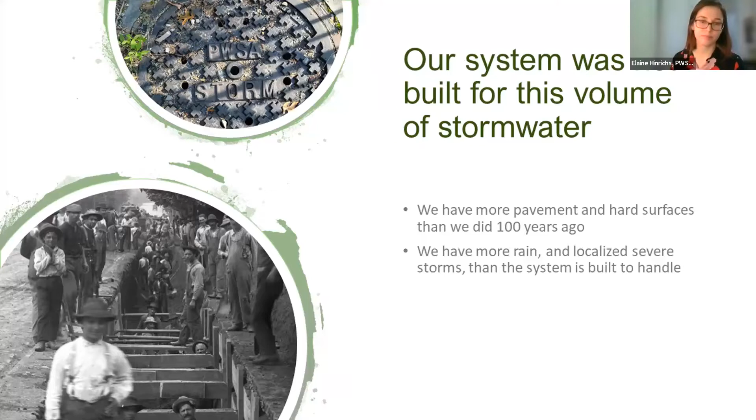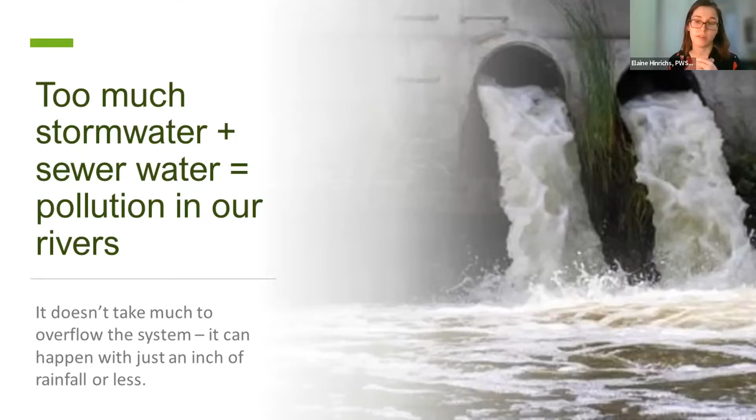So this stormwater often combines with sewage from toilets and sinks in our sewers. If the sewer system gets overwhelmed through storms, instead of sending the sewage to the treatment plant to be cleaned and released back into the rivers, the system dumps it directly into rivers and streams, or it can also back up into people's basements. It doesn't take much to overload the system. It can happen with just an inch of rainfall or less. And that means that billions of gallons of overflow reach our streams and rivers each year.

In response to these growing stormwater issues, the Pittsburgh Water and Sewer Authority is stepping up. Historically, we've been responsible for the conveyance of sewage. In terms of stormwater, that means that PWSA is responsible for stormwater once it entered the sewer system through a storm drain or a roof downspout, while the city of Pittsburgh was responsible for stormwater above ground. In 2019, the PWSA became a stormwater authority in addition to being a water and sewer authority. We're collaborating with the city of Pittsburgh on who's responsible for what when it comes to stormwater.

So in addition to working to reduce overflows of combined sewage and basement sewer backups, we're also starting to work on flood mitigation. Our goal is to build a system that keeps as much stormwater as possible out of our burdened sewers during rainstorms and mitigate flooding.

The Wightman Park Stormwater Project is one of many projects we're designing and building across Pittsburgh to help reduce pollution and flooding. The second phase of the project focuses on capturing and bringing stormwater to the new stormwater storage infrastructure that was built within the park during the first phase.

The Wightman Park project was brought about through a public process where community members helped to develop a master plan and final design for a safer, cleaner, greener, and more accessible Wightman Park with better stormwater management.

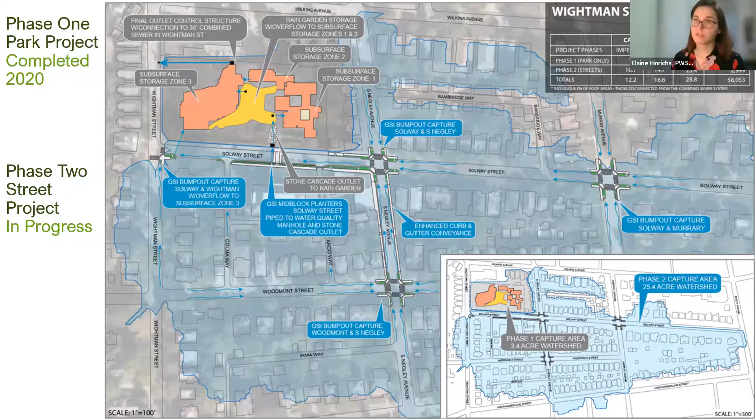This map shows the project capture area outlined in royal blue. This is the drainage area managed by the street stormwater infrastructure. The light blue areas are the project work areas where the new stormwater management infrastructure has already been constructed or will be constructed. The Solway Street and Murray Avenue intersection towards the right of the map is the remaining intersection where stormwater retrofits will be constructed this year. Work in the other project areas this year will include plantings and maintenance.

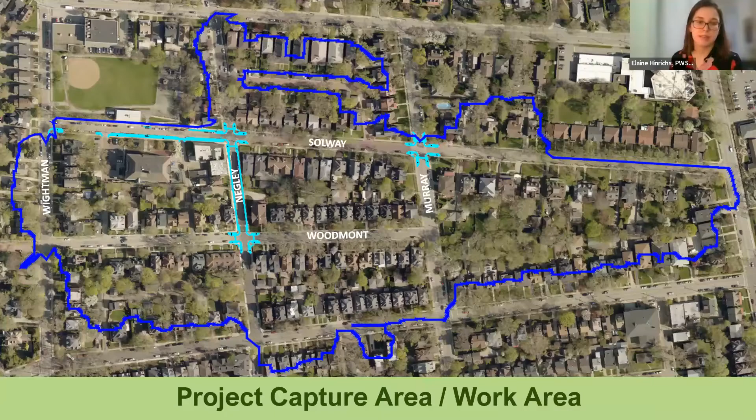The stormwater retrofits include the addition of what we're calling curbed stormwater bump out planters at intersections, channel drains that convey stormwater under the street between planters, and upgraded sewer inlets.

The stormwater bump outs are designed to help protect pedestrians at crossings by decreasing the width of the crossing, which helps reduce the amount of time it takes to cross the street, and also provide natural amenities with plants.

The stormwater conveyance is the narrowed part of the planters, you could say. From the intersection, the planter can be somewhat wide, and that's the purpose, to be a bump out, as it goes closer to the park, in this case from Negley towards the park itself. The conveyance narrows to get back some of the street and still convey stormwater.

This also includes intersection retrofits with ADA ramps, and the mid-block crossing, which is on Solway Street from the park to the carriage house, is also raised to help reduce the likelihood of pedestrian incidents.

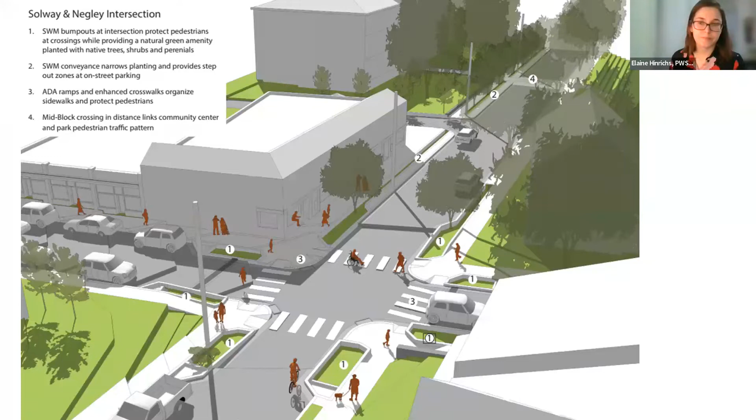So now I'll go through the design for each portion of the Phase 2 project.

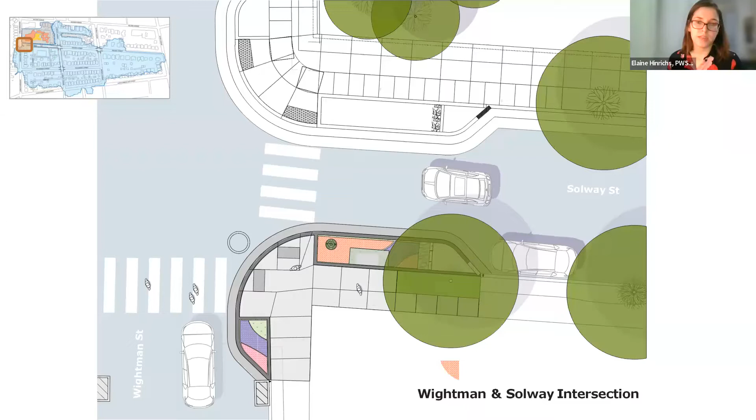At the intersection of Wightman and Solway, the stormwater planter on the north side of the intersection was constructed during the Phase 1 park improvements. The new concrete planter box was constructed on the south side, mirroring the north side. New inlets were also installed to help capture stormwater, and stormwater from that new planter box on the south side is conveyed through a pipe under the street into the park.

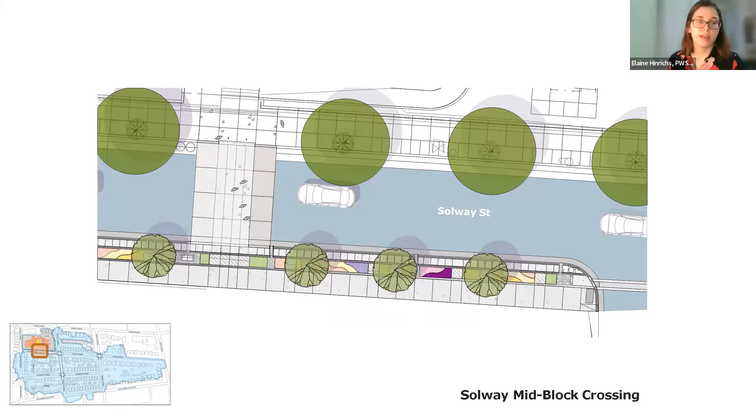The raised mid-block crossing of Solway Street, between the carriage house and Wightman Park, is to provide a safer crossing. Stormwater in the concrete planter boxes on the south side of the street is conveyed to the park under the street itself.

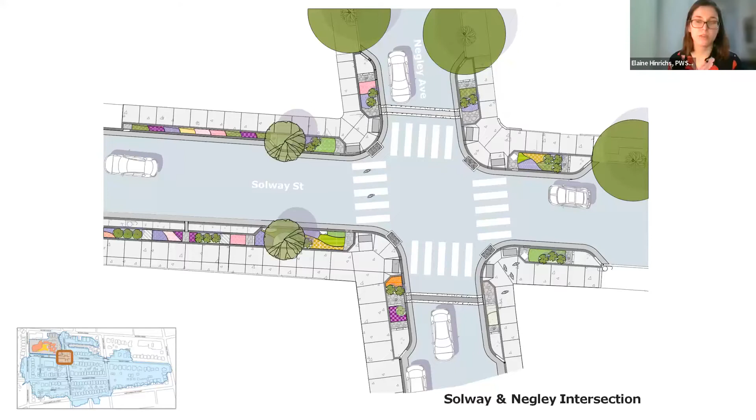At Negley and Solway, planter boxes at the intersection corners are connected to the long linear planters that lead to the park. The planter boxes are designed to capture smaller, more frequent storms throughout the project area. When these planters reach capacity during larger storms, they're designed to overflow into the new inlets that then connect to the existing sewer system. This acts as a backup in case of larger storms.

The Negley and Woodmont intersection has a similar design to the Negley and Solway intersection. This drawing shows the linear trench drains crossing Woodmont Street. Stormwater running down Woodmont will enter a planter and then be carried either under the sidewalk corner in a pipe, or under the street in a trench drain to the next planter, continuing down towards Negley and Solway.

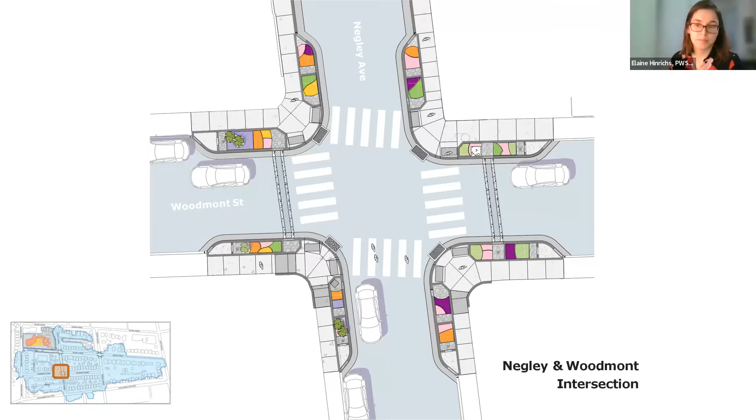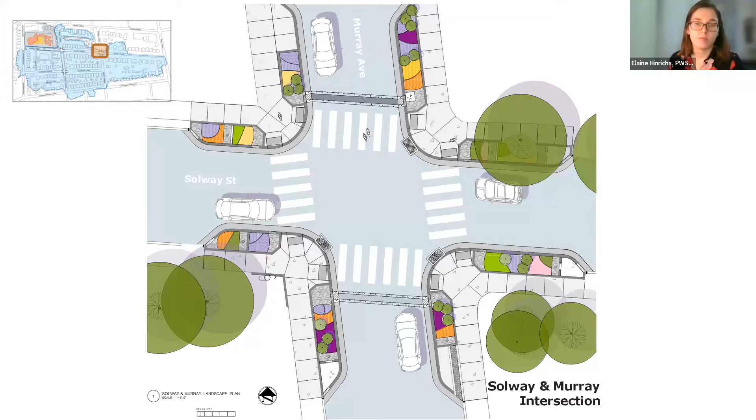The Solway and Murray intersection is the remaining intersection for construction work this year. The design is similar to Woodmont and Negley, but we changed two of the bump out planter designs to accommodate bus stops along Murray Avenue. We're planning platforms as part of these bump outs instead of depressions, so that folks can stand on them and board the bus.

I'll now move into giving you an overview of the progress we made on construction in 2021. Construction began in April of 2021 due to cold weather and restrictions on paving. We entered a winter construction pause in December of 2021.

During 2021, we constructed 4 of the 5 subphases of the project. We broke the overall phase 2 project into 5 subphases based on location for ease of construction coordination. In 2021, we completed the construction parts of subphase 1, near Wightman Park at the Wightman and Solway intersection; subphase 2, the mid-block Solway Street crossing; subphase 3, the South Negley Avenue and Solway Street intersection; and subphase 4, the Woodmont Street and Negley Avenue intersection.

In this entire project area, across subphases 1 through 4, we also completed some initial plantings in some of the planter boxes.

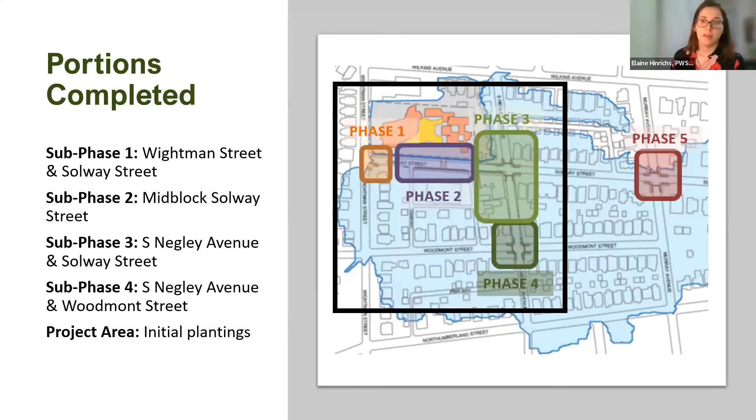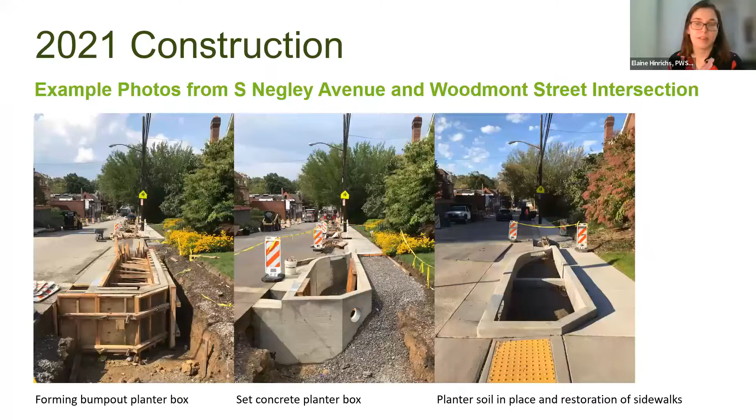To help illustrate the construction process, in case you didn't see it if you live in the neighborhood, here are some example photos from the Negley and Woodmont intersection. After excavating the future planter box areas, crews built temporary wooden frames to serve as molds when the concrete was poured. The wooden frames were then removed and pipes or trench drains were connected to the set concrete planter box. You can see the hole in the middle picture for the pipe that would go under the corner of the sidewalk. Once the planter box connections were complete, the surrounding sidewalks were restored and soil was placed into the planter box.

Construction is going to be starting again soon, which is why we're having this meeting to help folks learn about the project and ask questions, as we're coming out of the winter construction pause.

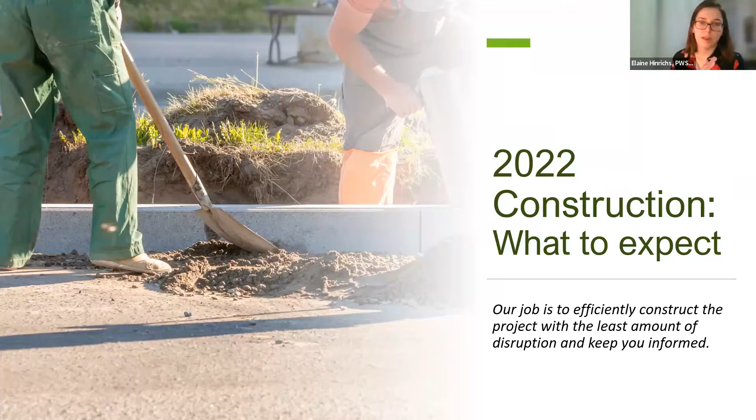We expect to mobilize for construction in late March or early April of 2022, and then expect to end construction this summer. The schedule may shift due to weather, unforeseen site conditions, or other factors. Work this year will focus on the construction of subphase 5 at the Solway and Murray intersection, and will also include final plantings and maintenance in the other subphase areas already constructed.

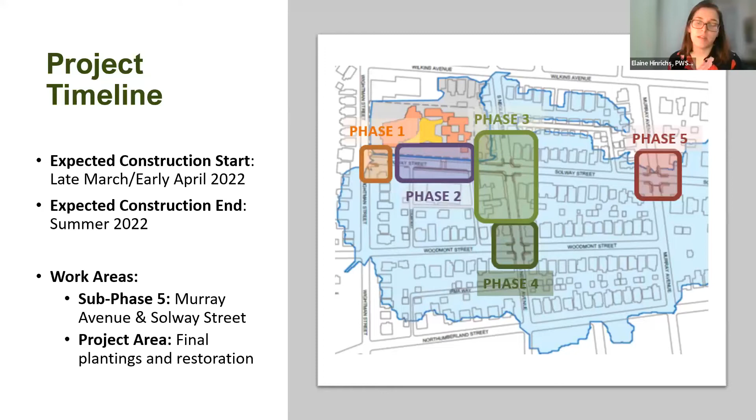All this work will be done in the public right of way, and the stormwater improvements will then be directing rainfall to Wightman Park. As part of this project, we've been doing utility coordination, which includes holding or relocating utility poles, and some relocation of gas line valves, water line valves, and hydrants in the project area. Final plantings and restoration are expected by summer of 2022.

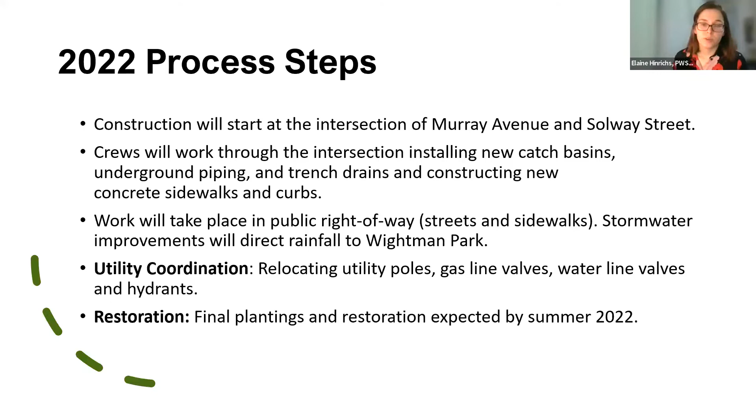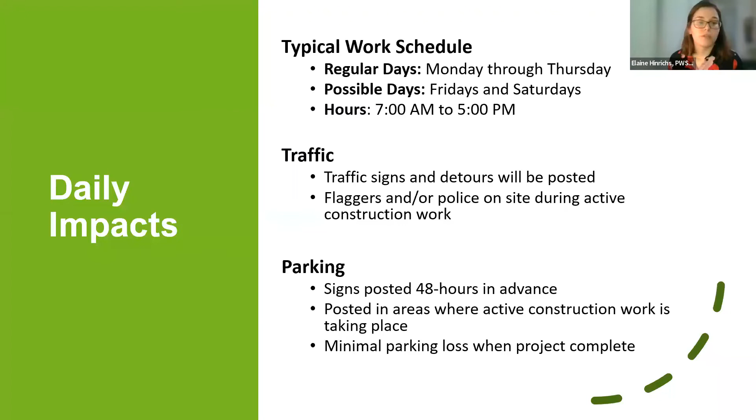For your daily impacts, the typical work schedule is going to be 7 a.m. to 5 p.m. Monday through Thursday, though Fridays and Saturdays are possible. Traffic signs and detours will be posted, and flaggers and or police will be on site during active construction work at the intersection of Murray and Solway. Parking signs for no parking will be posted 48 hours in advance in areas where active construction work is taking place. Minimal parking loss is expected when the project is complete.

For construction communication, which I normally handle, we are going to be providing construction updates every other week via email to our distribution list, as well as posted on our project webpage. Our project webpage is at pgh2o.com/Wightman-Park-2. We can also provide you with that email or link in the chat.

You can go to the project webpage or email me directly to sign up for our email distribution list. We also have a construction sign about the project up in Wightman Park, near the mid-block crossing, with project information and contact information. If you have questions about the overall project or construction, feel free to reach out to me by phone or email. You can also contact John Wada or Nick Armstrong from the construction project team with construction-related questions, or speak to folks on site if it's urgent.